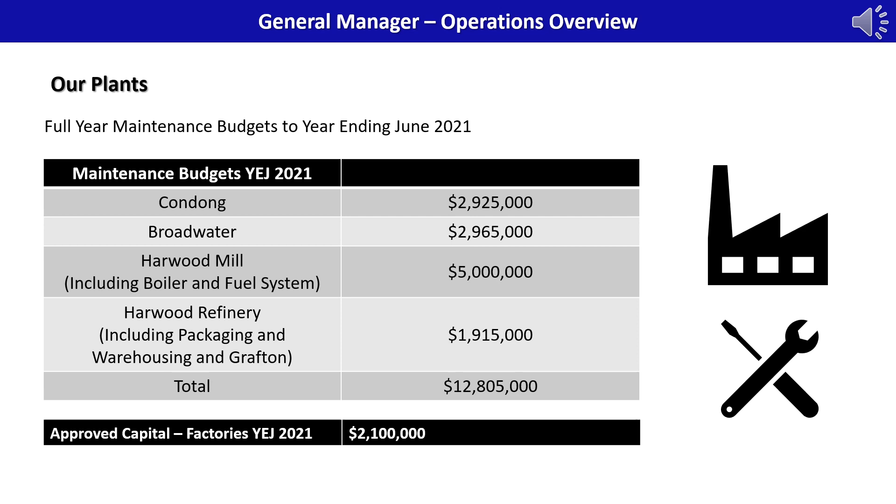We all know that our factories are ageing. The business is committed to maintaining our assets so that we can crush the members' crops and deliver a finished good into the marketplace. So over the last 12 months we've spent close to $15 million on maintenance and capital right across the business.

In November 2020 we achieved sign-off from the 6 councils across our growing region and the NHVR on our PBS permit system, which basically allows us to load to a gross weight of 50.5 tonne. This was delivered against advice from consultants that had worked in the Queensland cane industry that said it would take us years to get the PBS scheme approved. This was achieved by a lot of hard work by the cane supply team, in particular Jonathon Lambrick and SCT's Mick Summers. So after the approval in November we ordered a further 19 quad axle trailers.

Unfortunately we won't take delivery of all 19 prior to the start of the season. So we will have to phase out the tri-axle trailers at Harwood as the quad axle trailers arrive. We believe this will be only in the first few weeks. They're telling us we should have full delivery by mid-July. With that delay, MaxiTrans did have to stop their factory numerous times due to COVID related issues, and they also had issues getting parts from overseas.

Simon will talk in more detail about it, but we will start 2 harvesters at Harwood on the steel bins and on the tri-axle trailers, and then we'll phase that out, as I said, as the trailers arrive and we can push up on bin weights. It's worth noting that there's been further refinement to the movable bin stops, as well as weight concessions on the steer axle weights, which basically mean it'll make it easier to achieve our bin axle weight limits. I know we've thrown a challenge to the harvesting sector, but I'm sure working together we'll get there throughout the season.

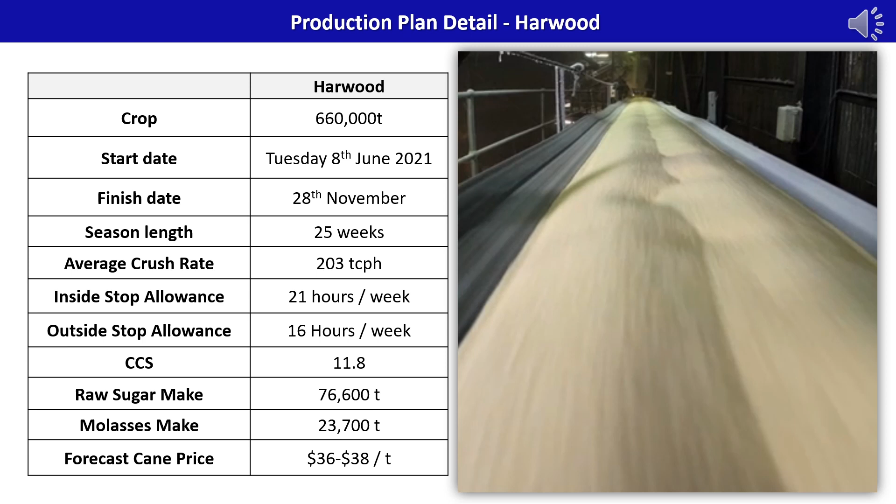In the refinery, we moved to continuous operation in the first week in February. This was due to our raw sugar situation, forecast crops, and our forecast sales program. And I see that as a real positive sign for our business.

That move came straight after the 3-week outage in January, in which we installed the new undergrate in the boiler, reinstated the economiser and did associated works with the ash system. So that stop was 3 weeks. It was probably the longest stop the refinery's ever taken, and it did impact us in finished goods stocks around the country, and we're slowly building that back up now.

Boiler fuel continues to be a major issue for us, running that boiler, particularly in the non-crush. There is just not as much fuel around as there used to be. The forestry industry is under immense pressure, and we're not seeing the volumes of wood waste and sawdust that we've seen in previous years. So that economiser and undergrate are very important for us. We're already seeing huge savings in fuel usage, and we plan on building substantial bagasse stocks this coming crush, so we've got that fuel into the 2022 non-crush.

So the refinery plan for the next 12 months is continue on the continuous roster, 7 days a week, 24 hours a day, and there's some positive signs out there with contracts into bulk sugar markets, which will help our operations.

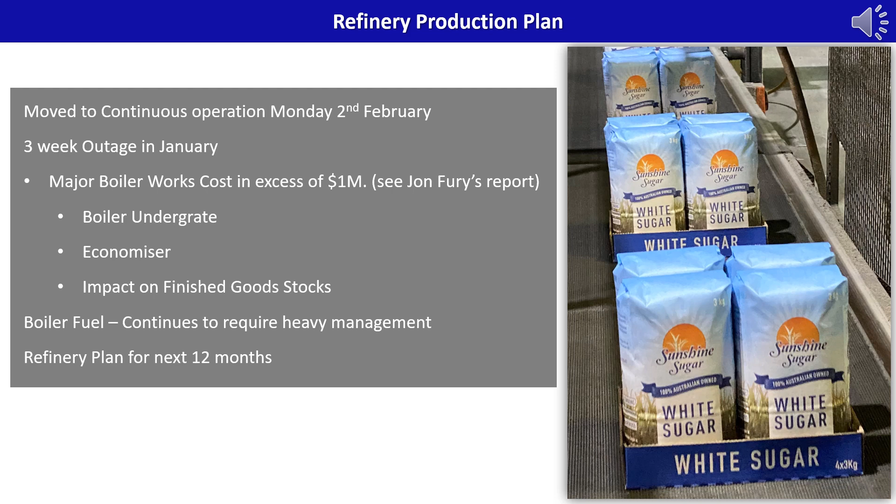Hello there, Simon Hollis here, cane supply manager at Harwood Sugar Mill for Sunshine Sugar. Just to give you a presentation on the upcoming season for harvest. So we'll have an overview of the estimate for 2021, some estimate notes, the forecast for 2022, what our harvest program entails, what pad maintenance we're going to undertake, and allocations for North Clarence and Clarence harvesting.

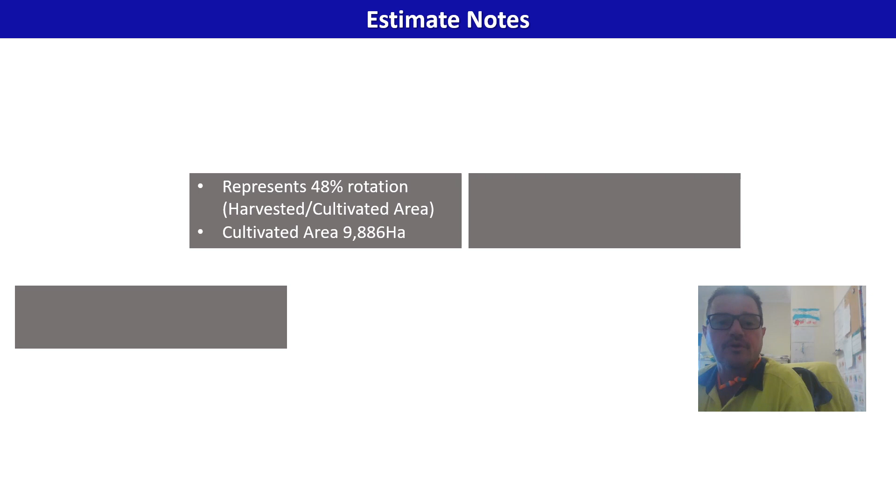So the 5-year average came through for 603,000. The estimate sent to the growers came back with 580, which we think is a bit light. So as a crushing budget, we're going to use 660 for our purposes and allocations. So it represents a 48% rotation, harvested area to cultivated area. Our cultivated area has reduced since previous years, so we're around about 9,900 hectares. Our average rotation is 52%, and of our cultivated area, there's 1,625 hectares of fallow.

Our estimate's probably been affected by the drought in 2019, where we only had 530 mil. As you can see, we got near 1,600 mil last year for the whole year, and currently we're tracking at 1,305. So there has been some damage attributed to flooding that occurred in March, as well as the heavy rainfall we had in January.

So we had 1,350 hectares planted last year, which was up on the previous year from the drought. It was about 1,100. Compared to last year, 27% was 208, 16% 232, and 15% was 240. This year for the cane planted last year, 208 is still around that 27%, but there's been a real push towards 232 and a bit of a slacking off at 240. 252's gained a bit of momentum as well. Overall, it's pretty much the same statistics. And overall, in the mill area, 36% of our area is 208, with 232 and 240 being our other major varieties.

So from this, the forecast for 2022 is around about 610,000 based on a 5-year average, anticipating probably upward potential on that with the 1-year-old that we're showing at the moment. We're nominated to start crush at 10 AM Tuesday the 8th of June, and it's projected to finish about the 28th of November. We'll be continuous crush from the start, at a 205 tonnes an hour budgeted crushing rate. We anticipate having probably a maintenance day every 2 weeks. In that, we've got 37 hours budgeted inside and outside stops based on our 5-year average; about 17 hours of that is wet weather.

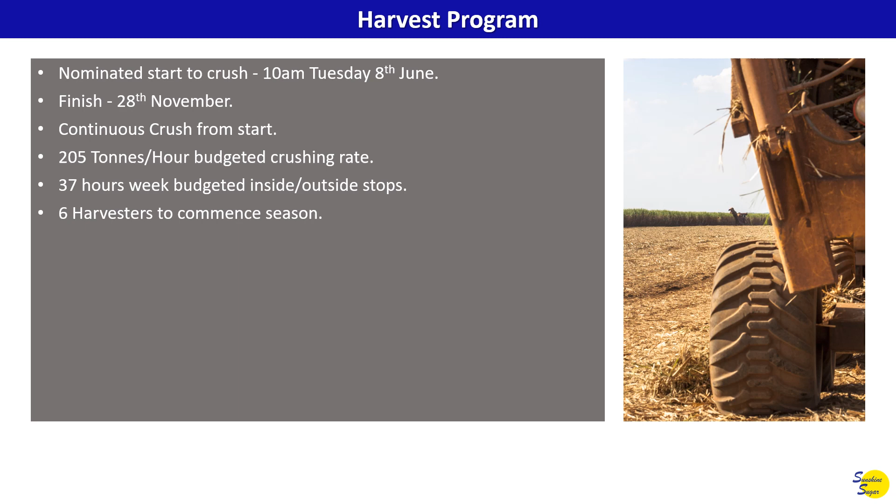6 harvesters to commence the season: four with Clarence Harvesting and 2 with North Clarence. We'll have 7 quad axles and 4 triaxles to commence the season, and the triaxles will come back into play when Condong commences. We've experienced a little delay with our quad axles, but once our trailers are delivered, we'll be back on the quad axles, and we'll see how we go with our triaxles with our steel bins. At this point in time, our average trip time is around about 56 minutes to and from the pad.

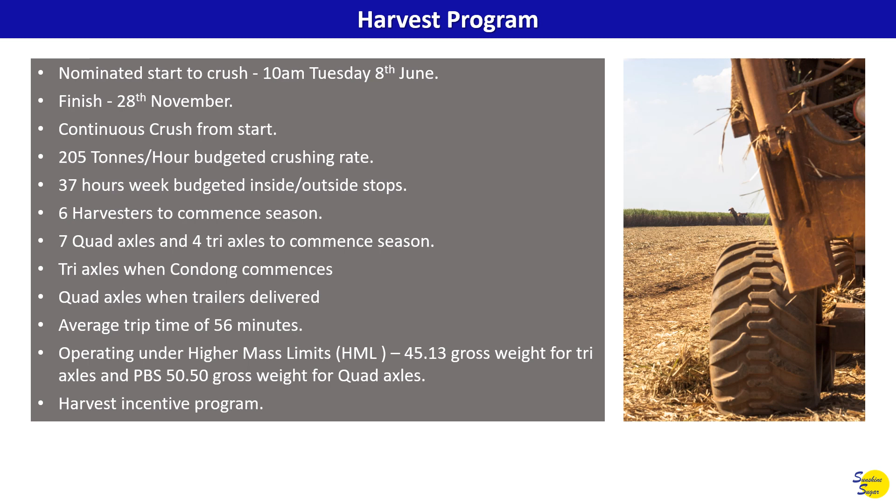Our triaxles will be operating under higher mass limits, so it gives us a gross weight of 45.13, which is around about 23 tonne. And with our quad axles, we should be able to go to a gross weight of 50.5, so 27 tonne may be the target. Again, we'll have a harvest incentive program based on either the higher mass limit or the PBS.

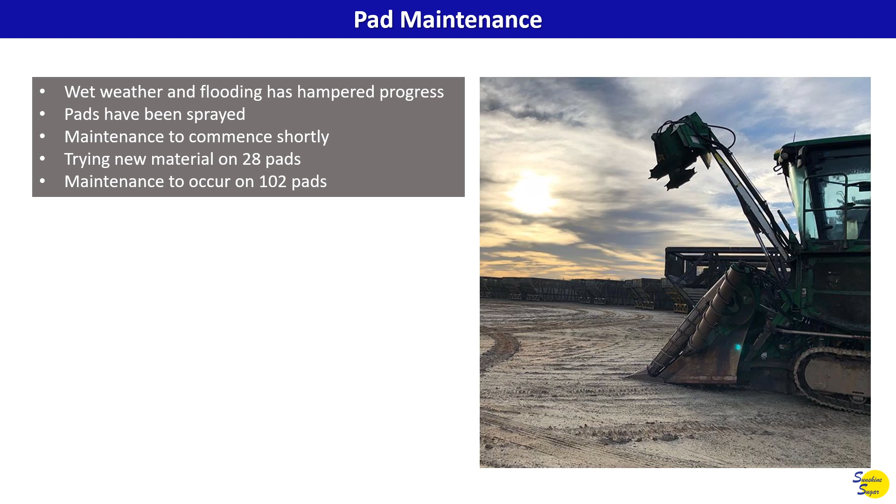Pad maintenance. Wet weather and flooding have hampered our progress this year. We have managed to get out and spray the pads. We'll get the grass killed on those, and then we'll commence maintenance within days. But it'll be an interaction of the season commencing and still continuing on with pad maintenance, so we'll be managing that going forward. In saying that, we're going to try new material on 28 pads. We'll try a shale, see if it will stick to the pads better. And we're doing 102 pads, some sort of maintenance on all of those.

Allocations: North Clarence came out with about 208,000 tonne of the 580, which is around about 36% of the supply, which equates to about 1,770 tonnes a day at 205 tonnes an hour.

That equates to about 41 bins on steel bins. I anticipate having at least one North Clarence harvester on steel bins, and the other, on quad axles, will be around about 35 quota bins a day.

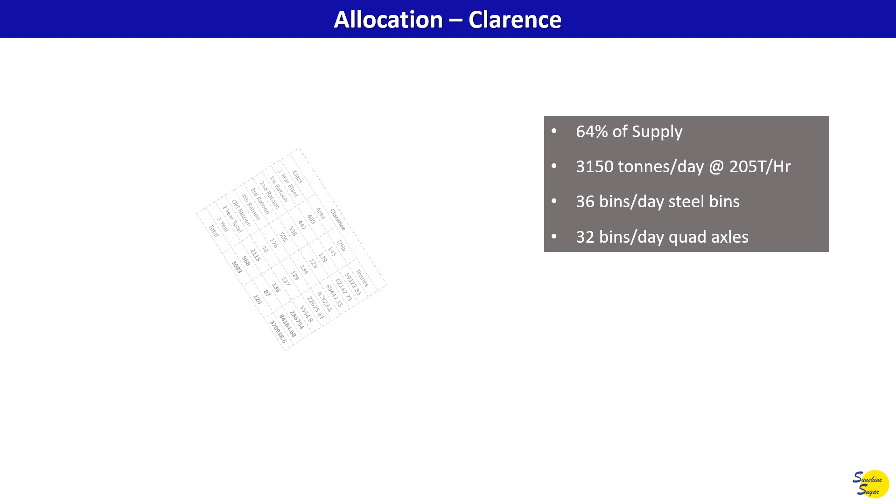Clarence harvesting is 371,000 tonnes of the 580, which is 64% of the supply. That equates to about 3,150 tonnes at 205 tonnes an hour, which would be 36 bins a day for steel bins, and equivalent of about 32 bins a day for quad axles. Thank you very much.

Hello, my name is John Fury, Engineering Manager of the Harwood facility, Sunshine Sugar. I'm going to run you through a few things we undertook over the last 6 months through the non-crush period, starting with the maintenance program in the process house.

Some of the major items we tackled included a major overhaul of our number 4 Jord filter, our pan cooler had a major overhaul with new worm drive, thrust bearings and drive wheel. We installed a new 4-inch oil supply and return pipe for our boiler fuel. We had a broken shaft and an ash conditioner screw which was replaced, and we totally stripped our plate evaporator, cleaned it and regasketed it.

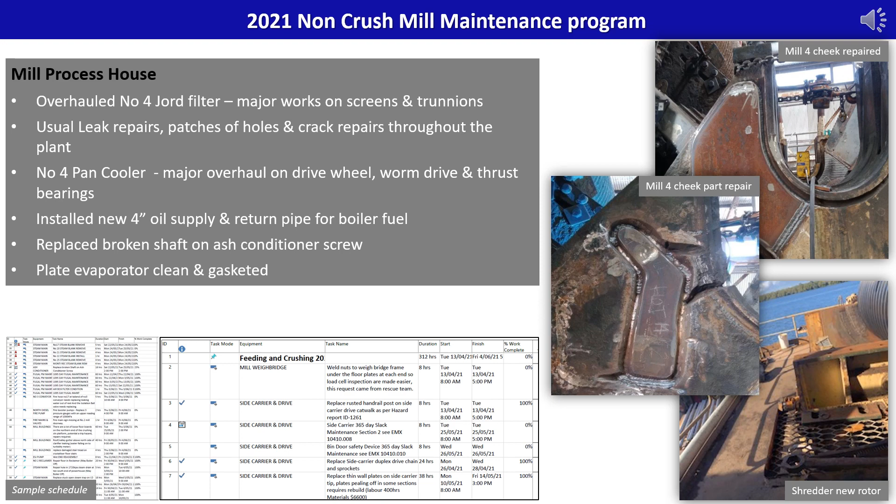On this slide we have the mill maintenance program. The major items undertaken in the mill included the side carrier drive being completely rebuilt with new sprockets and chains and the like. The shredder had a major overhaul, the rotor, which is pictured on the previous slide and this one, new disc bearings and grid bar as well.

Number 1 mill had an overhaul roller and trash bars. Number 2 had couplings, bearings, bushes replaced. Number 2 intermediate carrier had a new shaft, and spring steel bottom runners were replaced. Number 3 had a new front roller, a reshell roller, with top roller and brasses replaced. Number 3 engine had all the white metal bearing seals replaced, as they were leaking quite badly. Number 4 mill cheek repairs are pictured on the previous slide. We also reconditioned the brasses and repaired the under feed roller on number 4 as well.

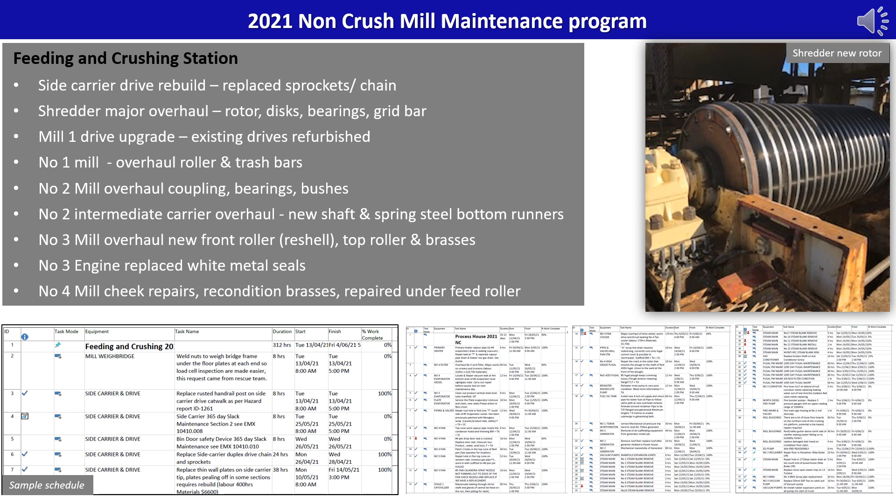A few screenshots of our program are down the bottom, and the other thing we did was the Mill 1 drive. Drives were totally refurbished under warranty through our supplier. We also upgraded the controller, which we believe was the root cause of the issues we had last season. However, those drives are no longer supported, and we do have new drives on order, expected on site around mid to late July. Therefore, if we do have ongoing issues with the Mill 1 drive, we have new supported drives on their way and turning up shortly.

We also had to replace our sub-ash conveyor, undergrate replaced, and economiser recommissioned on the boiler itself. That was the major focus of our January shut program. We have since completed the boiler insulation works and steam leak repairs in that area. The bagasse feeders had their level probes replaced.

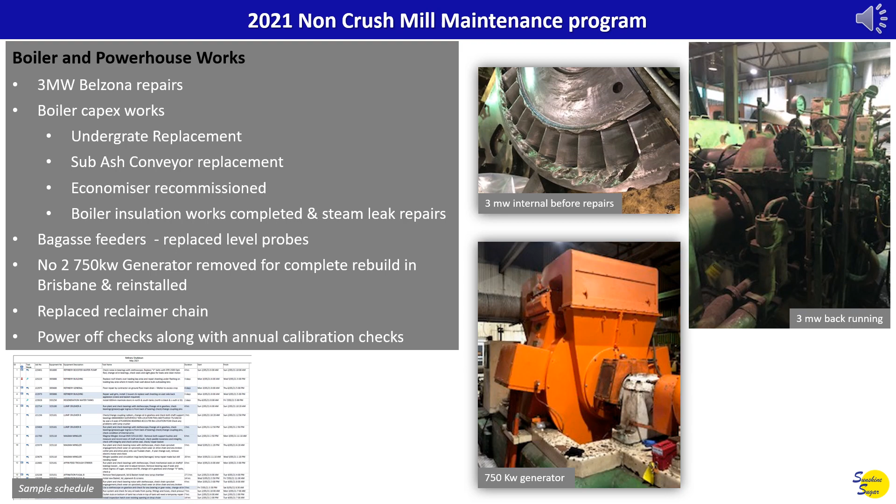We also had numerous bearing issues and roller failures on several bagasse conveyors, 5, 6 and 2, which have all now been rectified. Our number 2 750 kilowatt generator that failed last season was removed from site and sent to Brisbane for a complete rebuild. It has since returned and been reinstalled mechanically, and electrically we're just recommissioning it in the last couple of weeks before we start crushing. We had 3 days of power-off checks and annual calibration checks completed also across the site, mainly around the boiler and powerhouse though.

Sugar melter had a new gearbox installed. Applexion columns had rubber repairs and resin changes. Refined pan condensers A and B had some major pipe work replaced and flange repairs carried out.

White sugar fugals A, B and C had their annual maintenance completed. Packing lines, both the retail and bud pack, had their annual maintenance completed, and the retail plant had some new control screen panels installed. The settling tank received a major overhaul, totally blasted and repainted.

The syrup plant cooler had a major overhaul. Town water control boxes were replaced. Once again, the bagasse feeders I mentioned on the previous slide. The injection water pipe work was replaced to A condenser, and the water strainer was overhauled.

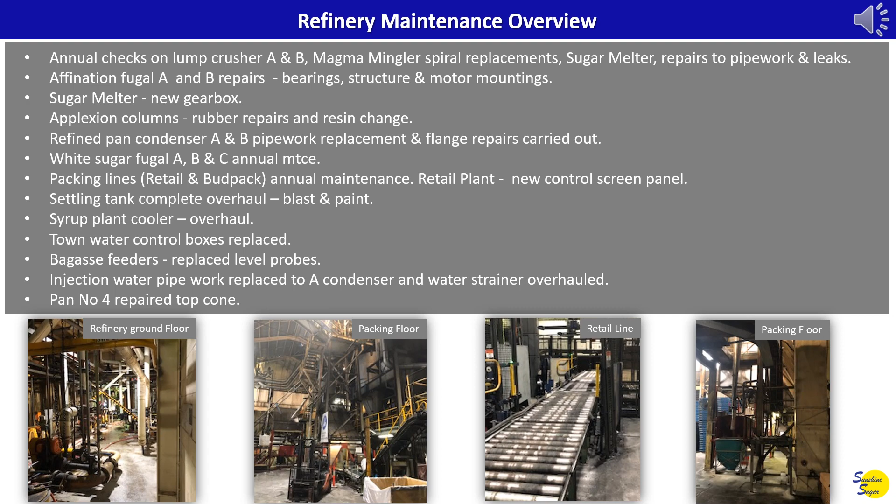We are also undertaking at the moment an air compressor replacement. They had two fail last year, and we are replacing both of them with a larger unit, and that will be installed in the coming weeks.

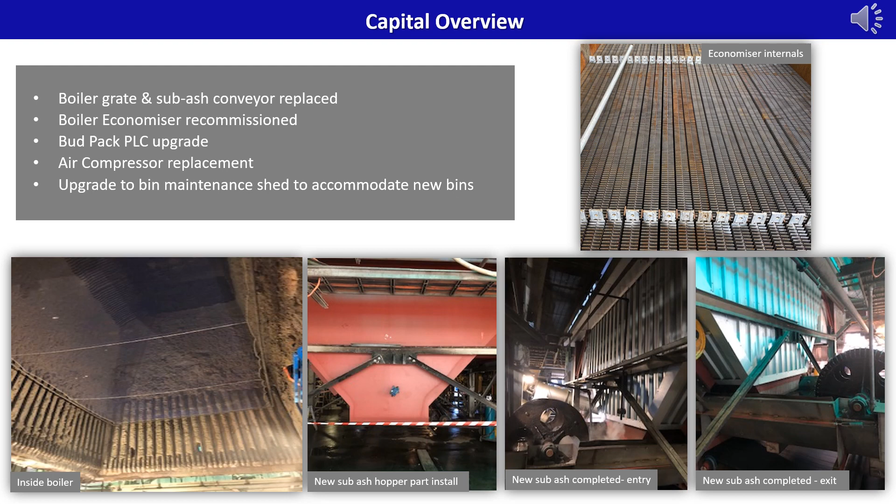We are also undertaking an upgrade to our bin shed, where we maintain our bins, to accommodate the new larger bins. In the January shut, we also did a Bud Pack PLC upgrade. It is not complete. It has caused some issues for us since, and we've had some major downtime because of it, and we are continuing to work on that and get that resolved.

We developed a new shutdown management program, fully documented, traceable and transparent, that we used in our January shut, which delivered a very good shut result, and all stakeholders quite happy and pleased with the result. It did give us quite a few lessons learned of things we can improve on for next time, which allow us to apply those to our next shut program.

We're developing at the moment a project management process, both for OPEX and capital programs. So once again, they are fully documented, communicated to all stakeholders and transparent.

We have undertaken some major floor repairs and roof repairs on our buildings, as well as some line marking was recently completed in our May shut. As I speak, we are undertaking some road repairs around our ring road at our rear entrance to our plant.

When the new finished goods warehouse was built, that roof allowed a lot of water to accumulate in that area and has damaged that road severely. So we have put in a spoon drain to stop that reoccurring, and we'll resurface that road.

We developed a root cause failure analysis program and process, as well as a training package, and that was rolled out to all stakeholders - operations, engineering, safety, quality and the like. That has been implemented as well, and we're reaping some benefits from that program.

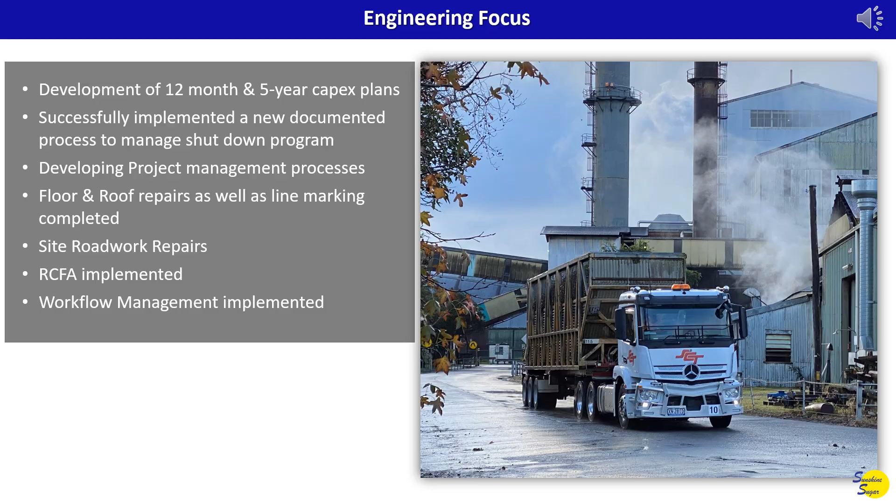Today we're going to look at a number of key issues for the season ahead. We will update the weather outlook and look at the implications for the upcoming season, look at changes to the mill mud distribution program, and discuss progress in the ratoon stunting disease survey that was recently undertaken. We will then update you on clean seed availability and progress in the approved seed plot, discuss some new varieties that are coming online, and then move on to look at weed control, drain cleaning and spraying, and the upcoming acid sulphate soils audit.

The latest forecast from the Bureau of Meteorology for the period of July to September 2021 forecasts wetter than average conditions through the period. However, the chance of exceeding median rainfall over the winter period is less in coastal areas. Across the Harwood Mill area, the Bureau expects only a 50 to 55% chance of exceeding median rainfall.

The El Nino Southern Oscillation Index, or ENSO, reading is currently neutral, as is the Indian Ocean Dipole. Warmer sea temperatures to the north of Australia are expected to bring increased chances of winter rainfall across much of northwestern and inland Australia, but the influence of this system is less in our area. The accuracy of the BOM prediction for this period of winter is 55 to 65%.

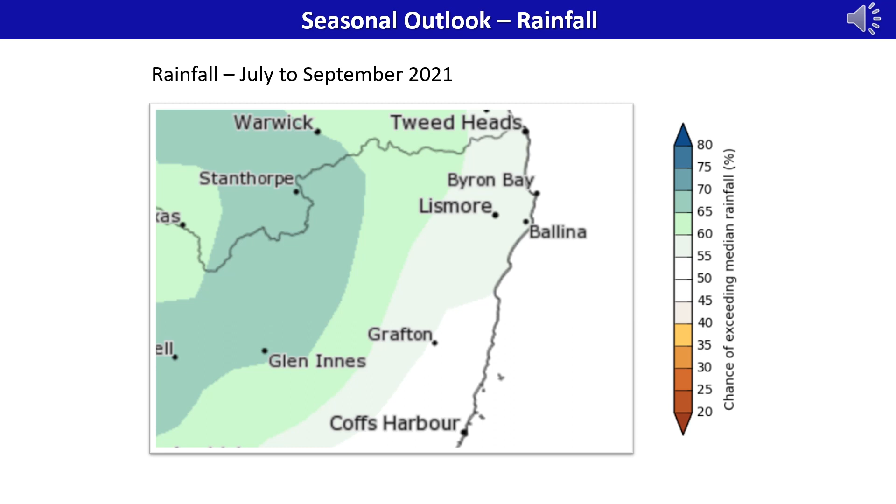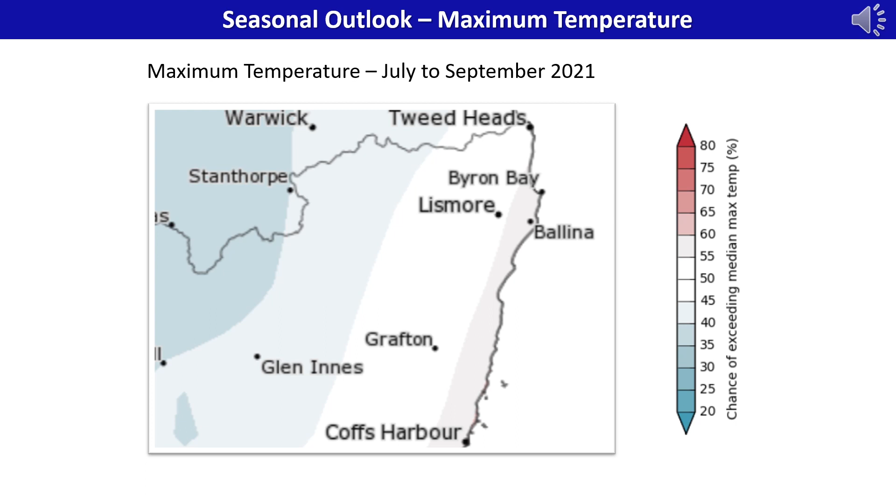Daytime maximum temperatures in our region have a 50 to 55% chance of exceeding the median levels, according to the Bureau. This should support further growth of the crop throughout the season. The chance of exceeding minimum temperatures is 60 to 70%. The past accuracy of these forecasts in our area is between 55 and 65%, according to the BOM website.

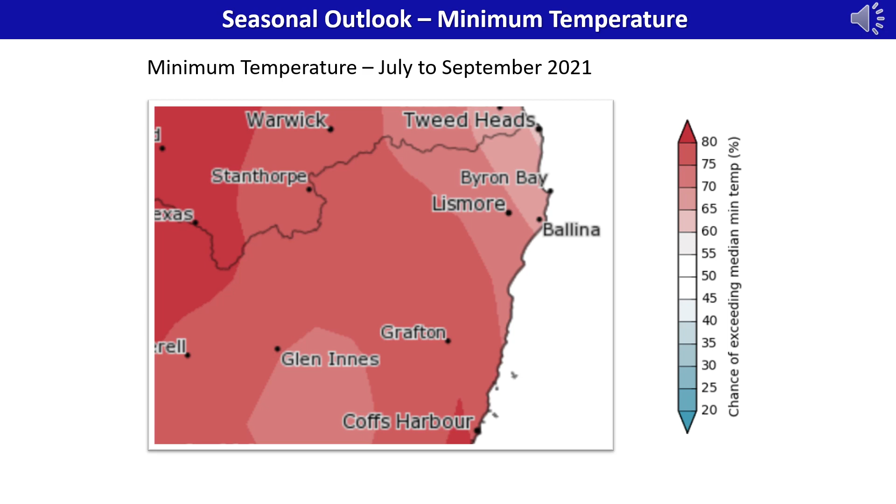That suggests that there will be less chance of frost during the winter period, welcome news given the frost damage that we've seen in recent years. Overall, the latest BOM forecast suggests that the winter should present reasonably good conditions for further growth and development of the crop. And while there is a chance of wetter than normal conditions in much of Australia, this influence should not be as great in our growing area.

You will soon receive your mill mud application forms. Any growers that wish to receive mill mud this season must complete these forms and return them to us. You also need to make sure that you have recorded the paddocks where the mud will be applied, as this is required under the EPA exemption.

We are required under law to demonstrate that these conditions have been met and to keep records of paddocks where mud has been applied. You can only apply mud to a specific paddock once in every 4 years under these rules.

You will also need to let the driver know the paddock number where he is applying the mud, and he needs to record this in his system. Drivers will be provided with copies of farm maps to assist in this process.

Prices for mill mud delivery will increase this year, reflecting underlying increase in the costs of fuel and other operating expenses. We will advise you of this cost prior to orders being received. Please note that the same dump prices applied during the season will now also apply to any ash delivered after the season is finished.

We're currently undertaking a survey of first ratoon and first ratoon replant crops to better ascertain the incidence of ratoon stunting disease, or RSD, and to understand its impact on our overall production. Mark has completed the collection of 150 to 200 samples in the Harwood mill area, and this has been replicated at Broadwater and Condong. The samples will now be analysed in the SRA labs in Brisbane.

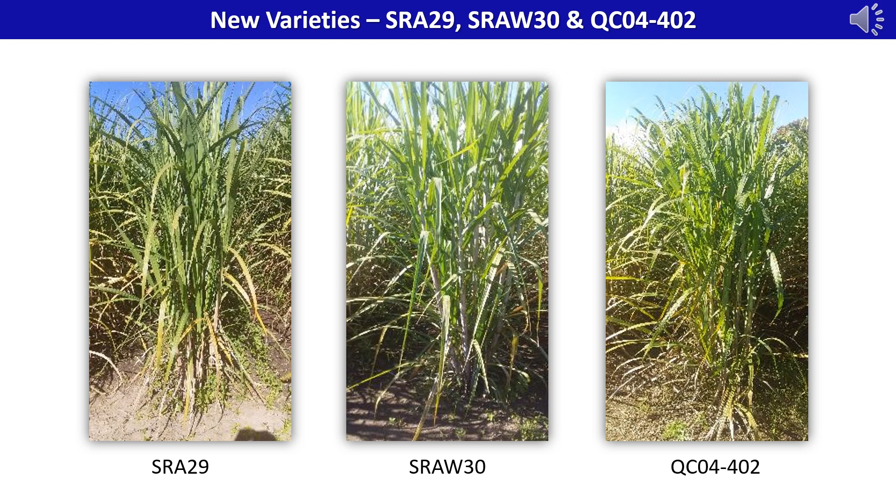Weeds can have a severe impact on sugarcane yields and on your farm profitability, competing with cane for limited moisture and soil nutrient resources. Studies by SRA undertaken back in 2008 show that suboptimal weed control can cause an average loss of yield.

to the value of $338 per hectare, probably getting towards $500 per hectare in today's money.

When managing weeds, timing is the key, and a delay of even a week can make a substantial difference in your ability to control them. The wetter season this year has provided ideal conditions for a build-up in weed seed.

We have copies of the SRA weed management in sugarcane manuals. These are a great resource, and we encourage anyone who hasn't yet picked one up to contact us and organise to get one out to you.

We will also be updating and releasing the Sunshine Sugar Agricultural Services Weed Control and Spraying Manual in June. This is another great resource, and it will be posted to the Sunshine Sugar website and electronic copies sent out

to those growers who have email available, and we can provide you with a paper copy on request. It provides updated information on treatments for common weed problems and is targeted to the specific threats that we face in the local region.

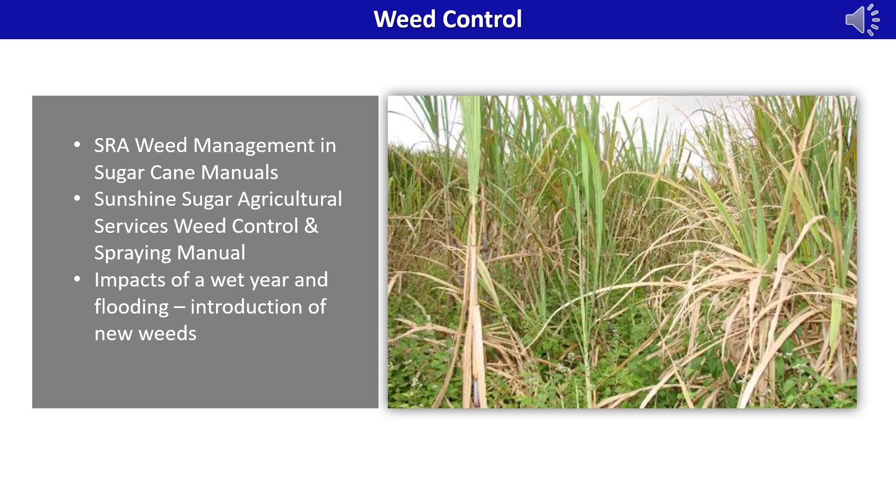We've seen a new threat emerging in terms of weed control. Swamp panic is a grass species native to Southeast and Southern Asia and Northern Australia. It has been seen in the Clarence as far back as 1982, but this year we have seen significant expansion

in the area that it covers. It can be very hard to control and very expensive if you let it get out of hand and into cane growing areas. Swamp panic grows in wet areas and produces a huge amount of seed which can spread with flood.

We have noted it particularly along new drains on the new section of the Pacific Highway through Tyndale, but we've also seen it in other areas.

Growers that get the best results against this weed treat it with pre-emergent sprays, including Flame and Balance.

Check with your local agronomist or chemical supplier to discuss alternatives and apply with reference to rates advised on the labels. If you have any issues with this, please contact us and we can work out a management plan.

Recent flooding has brought home the importance of maintaining clean drains that allow us to get water off our paddocks as soon as possible. As discussed in the previous slide, drains can also be an entry point for weed infestations, so let's make sure that they're clean and sprayed when required.

When spraying, ensure that you only use chemicals registered for that purpose and make sure that you check weather conditions beforehand. When cleaning drains, also make sure that you've checked your acid sulfate soils management plan and that you are following the requirements set out in the plan.